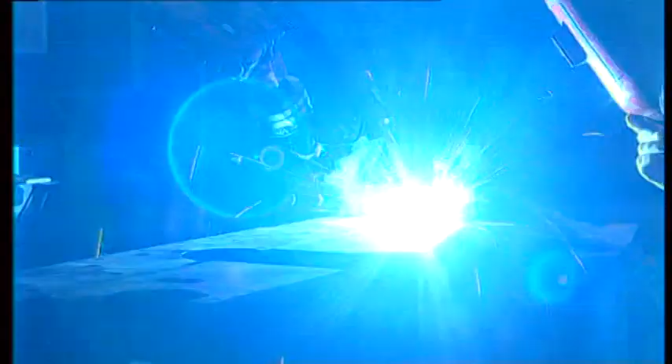Don Roque Vassalli laid the foundations in order to create and develop in Argentina an agricultural and industrial tradition which would be put on par with the most advanced of the world. Half a century later, his true attitude to life and his enterprising vocation are still present.

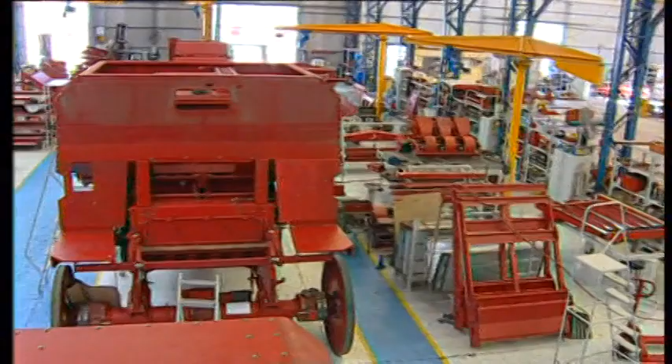Due to its location in the heart of the production area, which is essential in the agricultural and industrial chain of the country, and with more than 30,000 units produced, Vassalli Fabril Public Corporation has consolidated as the leader in the sales of national combines.

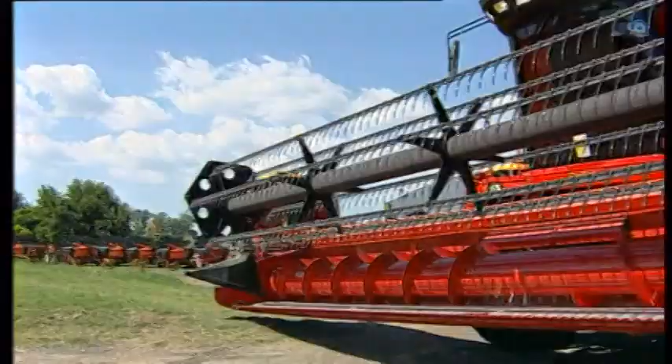An area, an industry. The two factories located in the city of Firmat, in Santa Fe province, in which Don Roque and Vassalli combines are produced, have 99,000 square meters. The capital of the company is 100% Argentinian, and 550 people work in-house, and more than 200 people work indirectly.

It is geographically located in an industrial, commercial and financial center, which is in the very heart of the most productive agricultural region of Argentina.

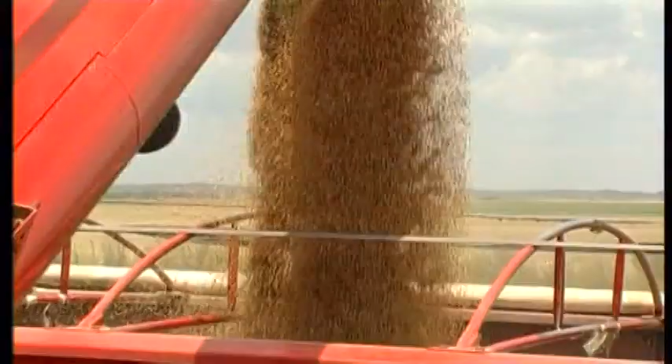Within the central area integrated by the provinces of Santa Fe, Córdoba, Entre Ríos, and the north of Buenos Aires, 77% of the agricultural machinery factories of Argentina are found. This is the most important area of the country regarding grain and byproducts exportation, which represents between 65 and 70% of the national exportations.

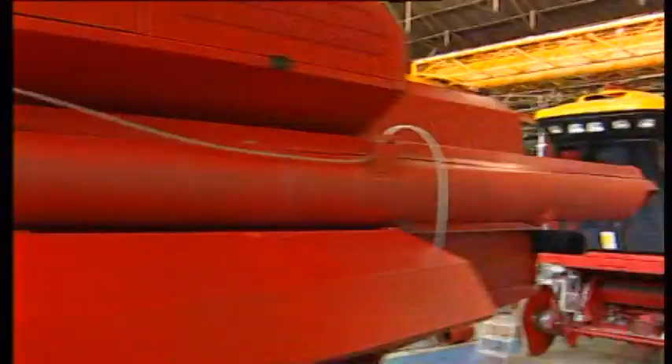The inheritance and the professional line that have followed Don Roque knew how to receive and enhance the innovative spirit of its creator. This meant a supporting policy that gave exclusive priority to the production, which allowed the sustained development of an important net of local and regional suppliers.

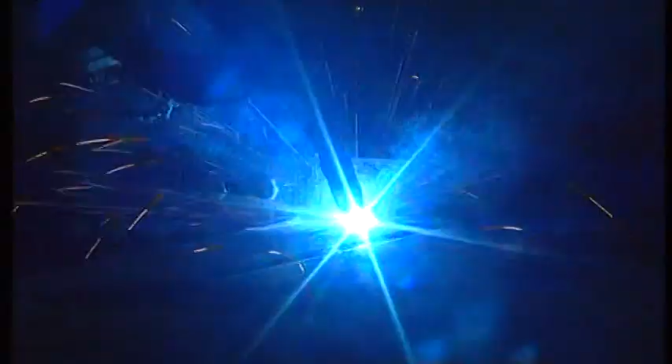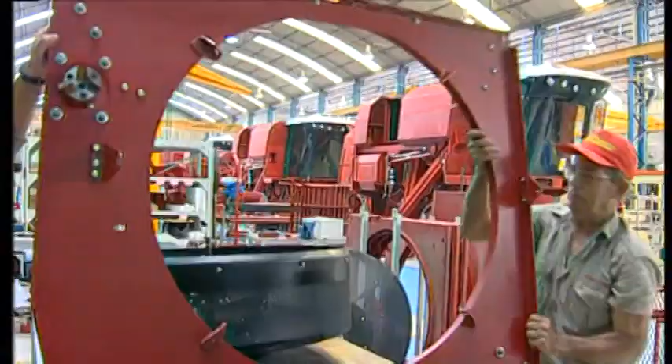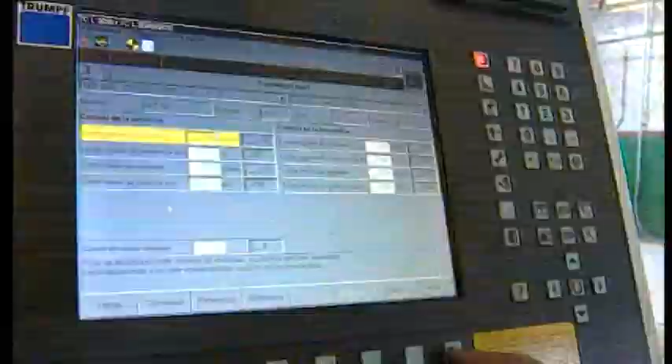Innovations in infrastructure and technology. In order to develop and maintain a high level of innovation, it is absolutely necessary to update and incorporate state-of-the-art technology in the different stages of the production process.

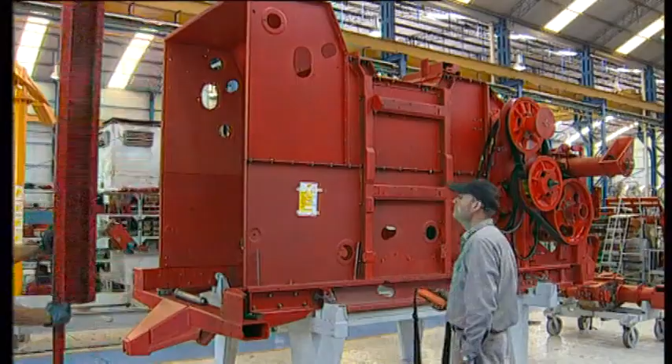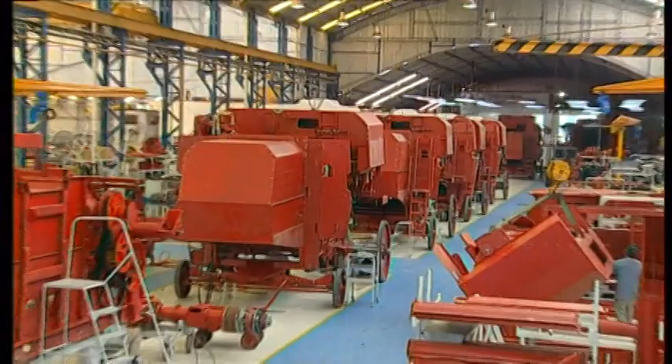The company has achieved the complete integration of its production processes in both factories, sensibly increasing its production capacity. Today, it is able to produce 800 units a year.

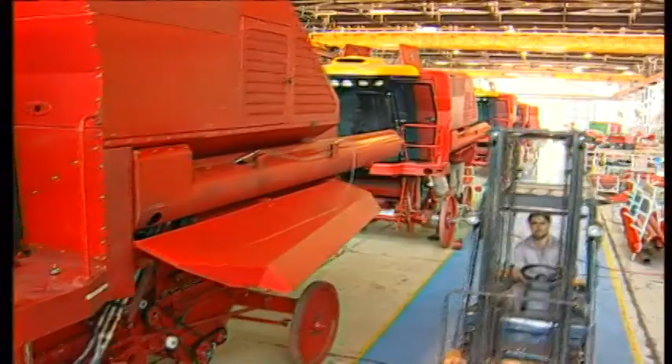The sound investment policy in infrastructure and technology aimed at re-equipping and improving the productive structure allowed, after the reopening of the historical combine factory Roque Vassalli Public Corporation, the launching of the Vassalli trademark into the market with a highly technological model and a huge threshing capacity.

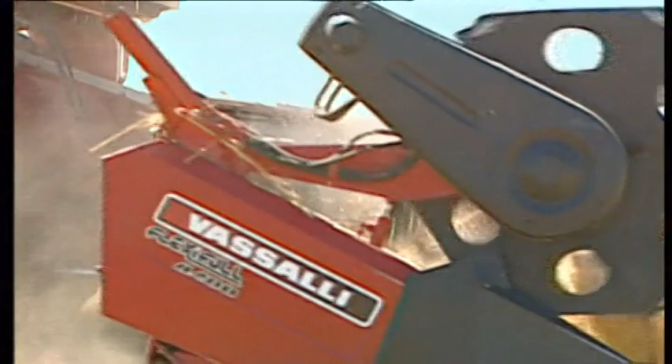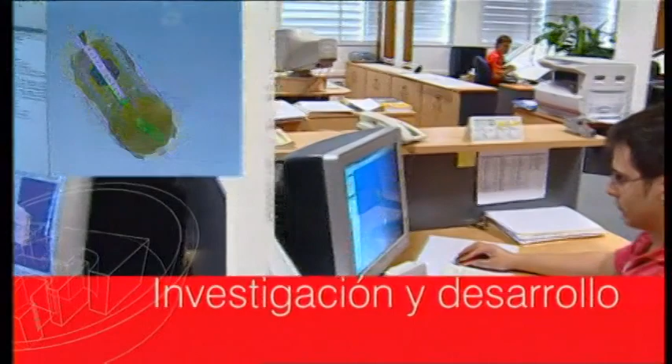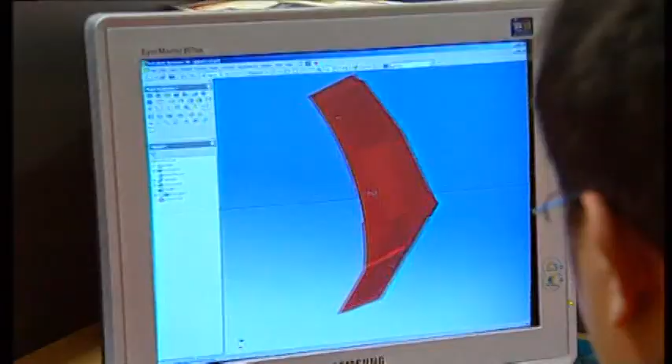Vassalli Fabril specially assigned a 1,800 square meters building to investigation and development. There, the offices of a new center have been established, and a professional team designs and tests new product prototypes, from the future new models of combines to the engineering and innovative processes applied to the already existent combine models.

This is done under strict control checks, so every innovation is tried and tested before reaching the market, guaranteeing a sound and reliable performance.

The force of a legacy that goes down in history. As a symbol of combines, the name Don Roque Vassalli has been linked to the Argentinian industrial growth in general and to the south area of Santa Fe province in particular throughout half a century of history.

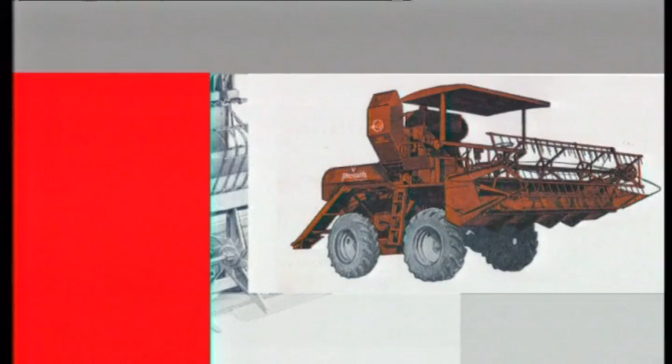The variety of models that distinguished the line of combines is a clear proof of Don Roque Vassalli's productive capacity and a distinguishing feature of the enterprise along its history.

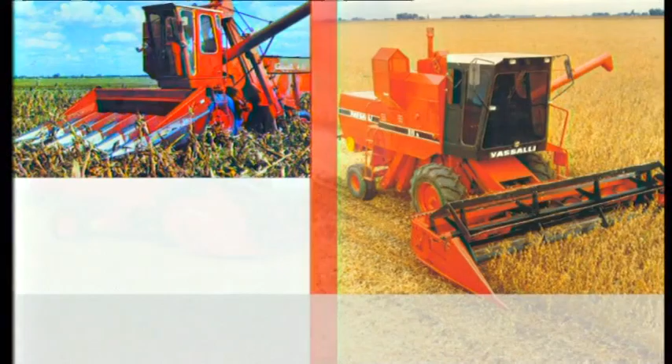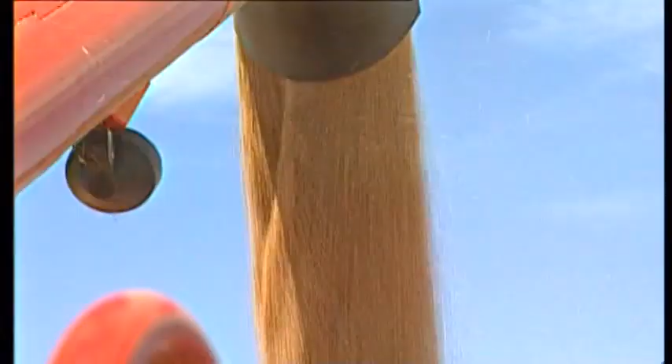Besides providing personal pride, his machines are characterized as being practical and of high performance. Each model has been accepted with widespread repercussion into the market, and many generations of producers grew together with the potential that each machine offered.

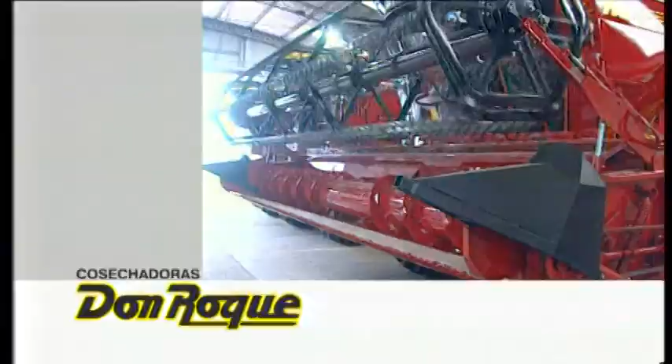The developments carried out by Vassalli Fabril in the latest years allow the agricultural producer to find versatile machines which are highly efficient and functional.

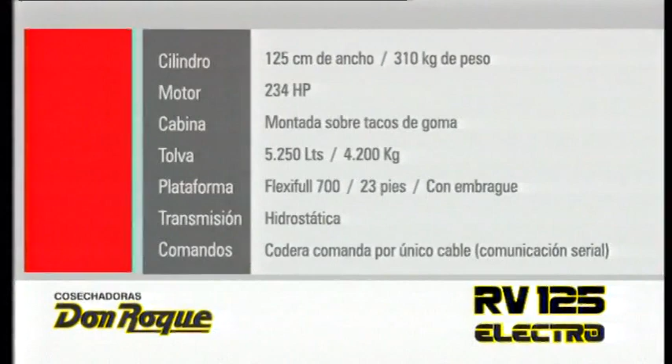The simplicity of its mechanics, together with its efficiency and threshing capacity, showed the basic difference of the machines produced by the enterprise.

The creation and launching of the model RV170 from the Don Roque trademark, the biggest and most sophisticated combine made in the country, represented an outstanding technological growth for Vassalli Fabril.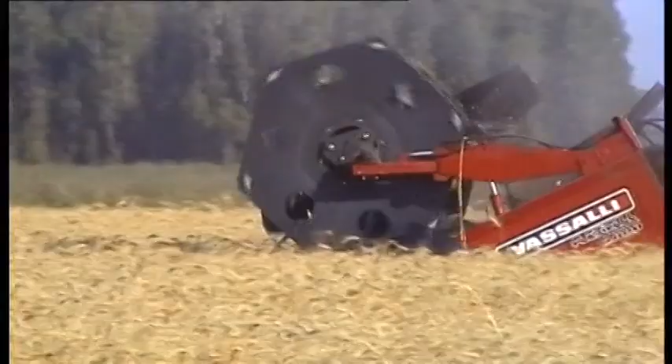This combine features engineering developments and state-of-the-art technology that make a qualitative difference when compared with other harvesters of similar characteristics.

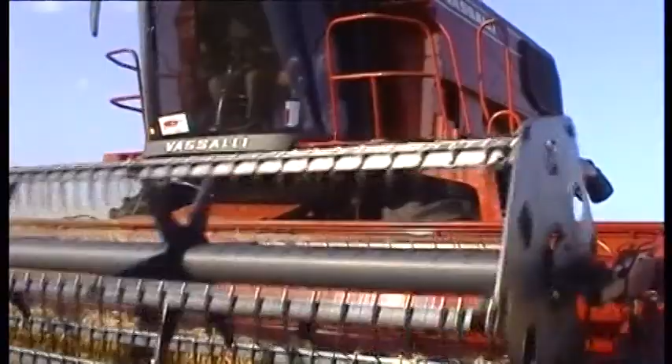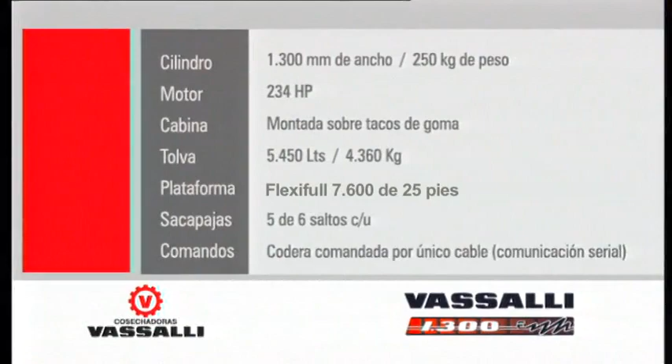With the Model 1550, the enterprise launched into the Argentinian market the Vassalli trademark, one of the most recognized icons of the national industry of this sector, which has gone through the modernization process of the Argentinian field.

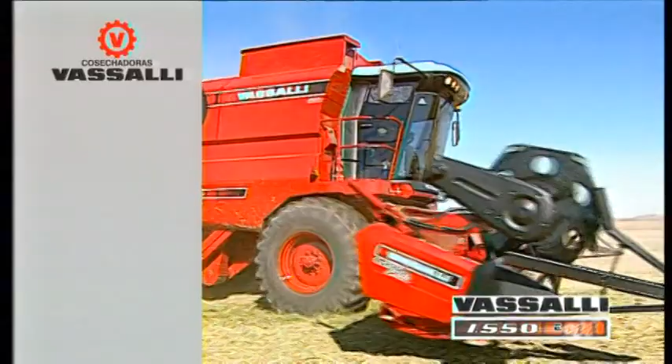This is a combine which strictly respects the tradition of the trademark: innovation, usefulness, constant search of high performance with low working costs, and easy maintenance.

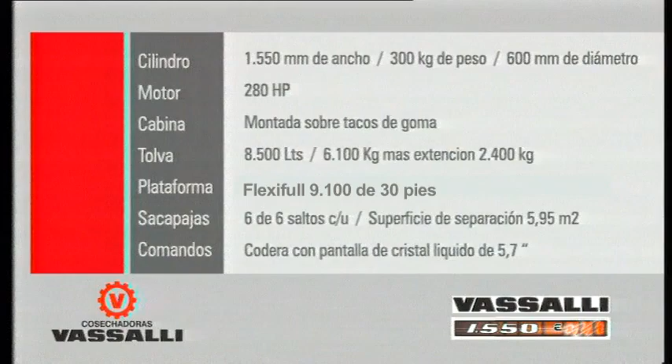By releasing its axial Vassalli AX7500 model, the company introduces the widest and most complete products portfolio of the Argentine combine harvesters market.

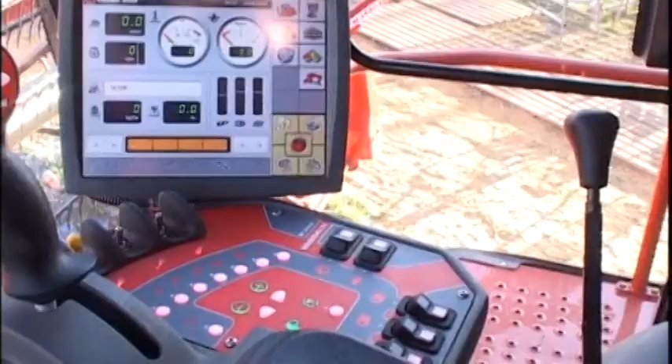The new axial Vassalli AX7500 represents the success of a 4-year-long project that took 24 months from the very first prototype to the final axial harvester, and paid due respect to the logic development steps in order to offer the market a solid and reliable machine which endured the hardest field tests in wheat, soybean and corn Argentine plantations.

This new axial harvester is aesthetically outstanding because of its attractive design, which includes curved planes and plastic materials that give both high resistance and a lower weight.

Moreover, it includes all the state-of-the-art technologies into a unique model, as a result of the continuous quest of fulfilling and satisfying local farmers' needs and an important investment in research and development.

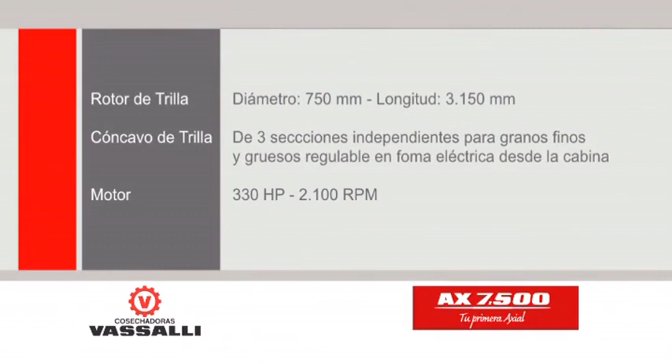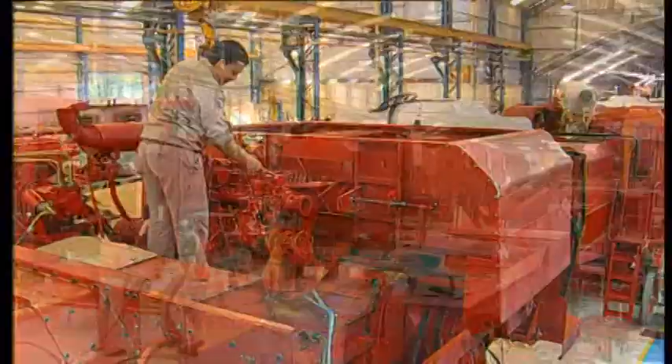From the very beginning, the company set up a net of concessionaires to provide spare parts in due time and conditions. This is essential for the work in the field to be carried out under any climatic or geographic condition.

Besides, it is an added value that the producers have emphasized as a determining advantage.

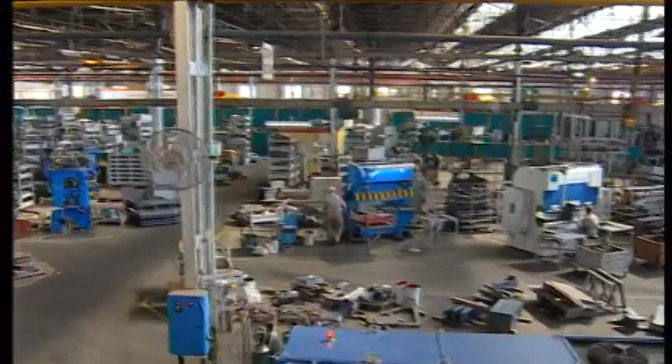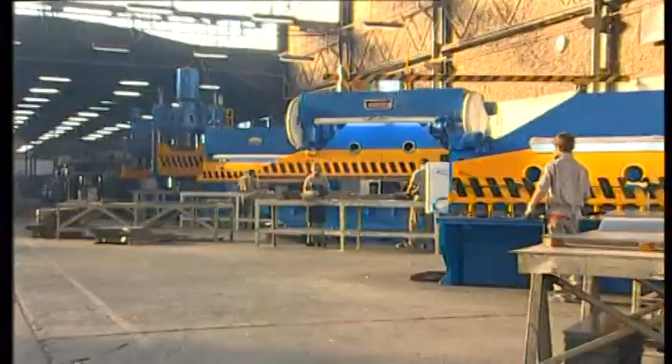A long way was covered from the pioneering visionary that became an icon of the national industry to nowadays factory and administrative and financial center. This has been achieved through a long journey, by focusing on the enterprising businesses that reached satisfactory conclusions.

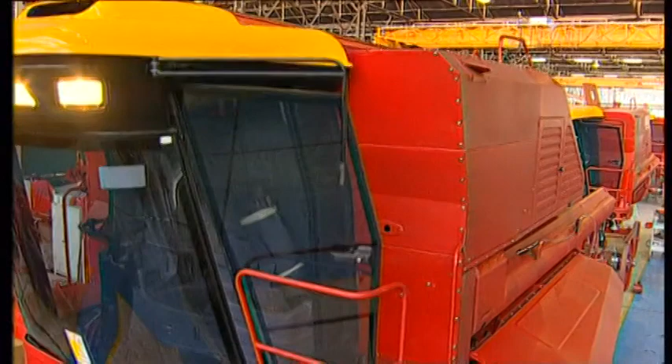New markets development.

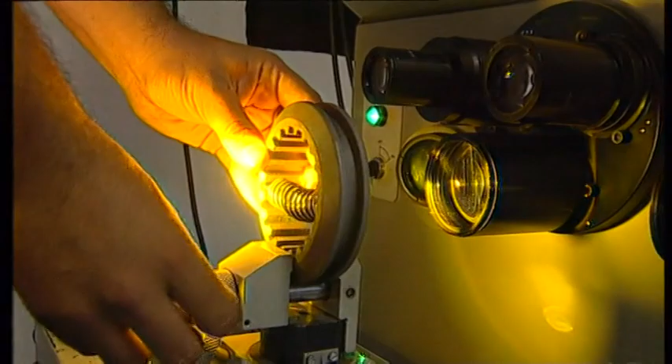The realization of new investments that broaden the production capacity of both factories, as well as the international competence, placed the machines produced by Vassalli Fabril Public Corporation in the present economic context in a favorable position.

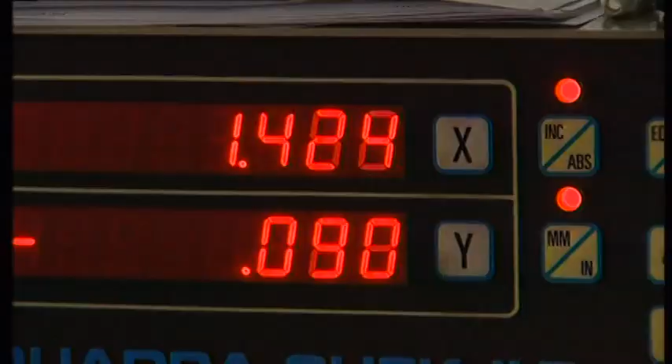This allows the company to make incursions into new markets, a strategic objective that defines short and long-term actions.

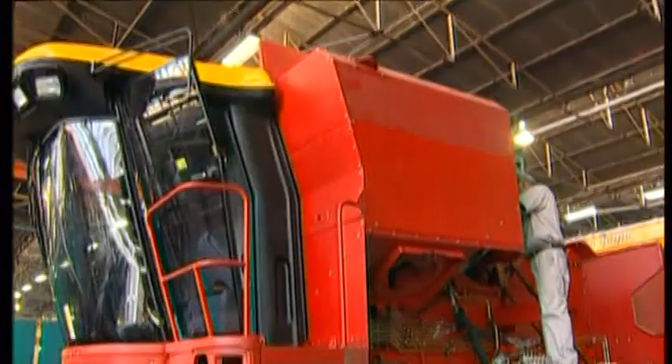Thus, after years of hard competition in the local stage with the main global companies of the sector, and with the active participation in commercial missions, a series of actions were taken so as to expand the commercial horizon into the international market.

An objective that joins us to go on growing.

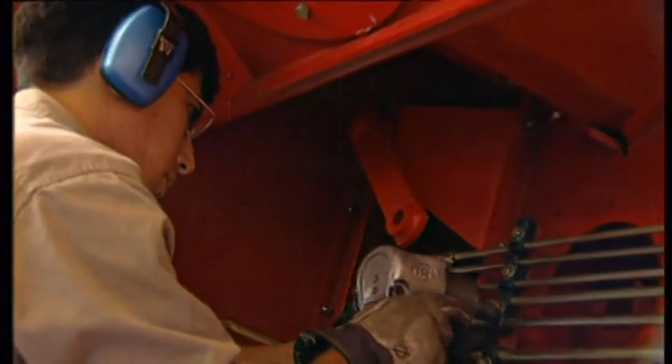We are happy since more than 500 families of Firmat, the city that saw us grow, can imagine and make a better future with their own work.

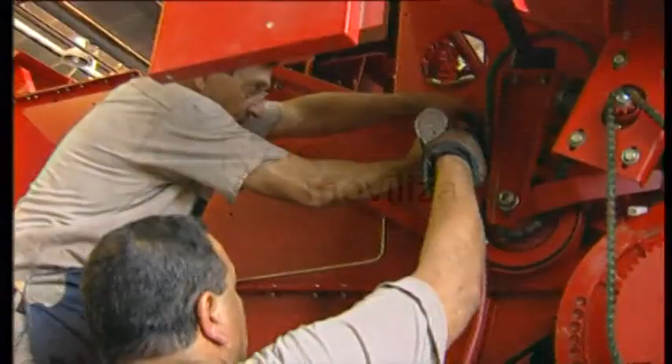We are moved because we know that in our province, field and industry, efforts are made and the imagination is used so as to create more activities and new possibilities to innovate.

We are encouraged because we know that we are part of a region that has become one of the big motors of our economy, prioritizing production.

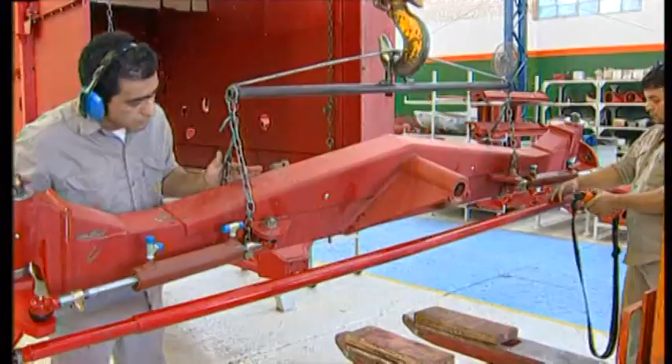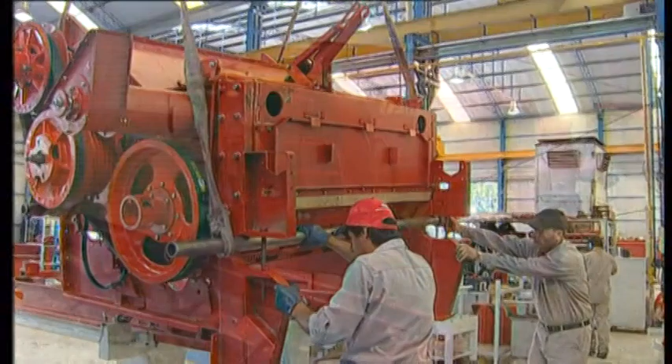We are excited since new borders from other latitudes are opened for the industrial production of our country to show its full potential. We are satisfied to prove how much it can be done when we all work together so as to achieve the same goal: to grow.

Today, in each field where the fruits of the labor and efforts are gathered, there is a Don Roque or a Vassalli reaping the best results.